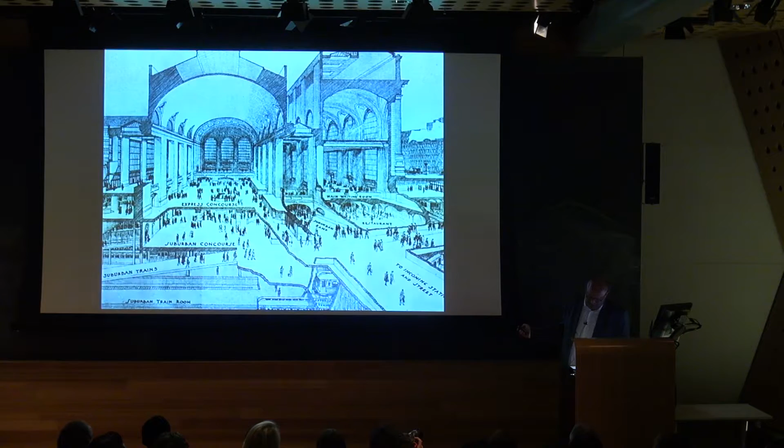This model of urban building ended, however, in the early 20th century with the rise of planning as a discipline distinct from architecture. With more efficient delivery systems for water, power, and transportation, requiring a skill set in management and logistics over that of the orchestration of public appearance, the relationship between the two fields became progressively more detached.

Today, the design of the flows of water, waste, power, vehicles, etc. produces de facto a genus of public space that is neither urban nor public. For architects, it has also preempted a false choice between designing on the one hand a demure background building, so-called background building, and on the other, pursuing a more solipsistic rhetorical agenda - the icon object building, more interested in autonomous expression than collective engagement.

Since the Reagan era, however, the now century-old systems model of infrastructure has proven increasingly difficult to implement. Onerous processes of appropriations, approvals, bidding, and oversight have made the public sector incapable of delivering projects as timely and cost-effectively as its private counterparts.

With the money that's actually available, and fearing the public will be all over them, the agency has determined to build a segment of rail that goes from a rural city to a rural city, so it can make all its mistakes in the relative obscurity of the countryside before entering the more urbanized areas.

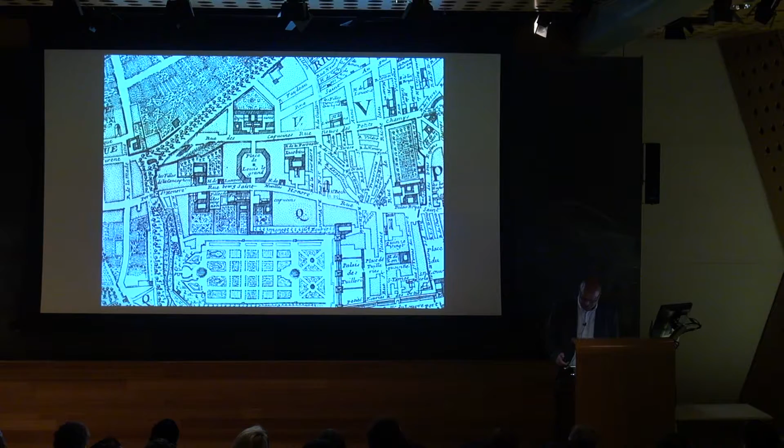This, for the property owner and his or her architect, offers the opportunity to enhance their political agency by using contents and appearance as a double-jointed proposition, as Trojan horse or as bait and hook, eschewing the fixed dynamic of NIMBYism in favor of a calculated strategy of trade-offs. Public benefits are built in as a means of sweetening the collective pot to elicit stakeholder or market interest.

So this is how it eventually got developed out with all of the housing around it here that you see. And I think what really becomes interesting over time is when you get these kinds of things happening.

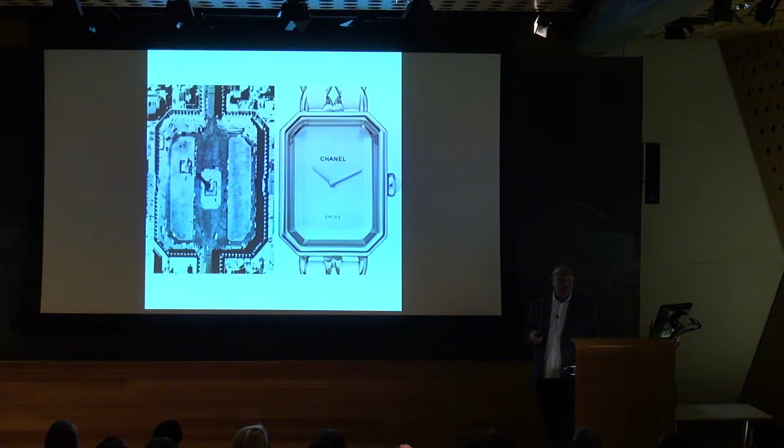I dare any infrastructural technocrat to imagine how a piece of infrastructure could actually have enough strong identity to generate its own jewelry. But I think that ought to be the inspiration that, in a way, the object icon is not the only means of achieving notions of identity in the city.

This is, again, kind of the Trojan horse aspect, the kind of paradoxical nature of the city and the question of identity.

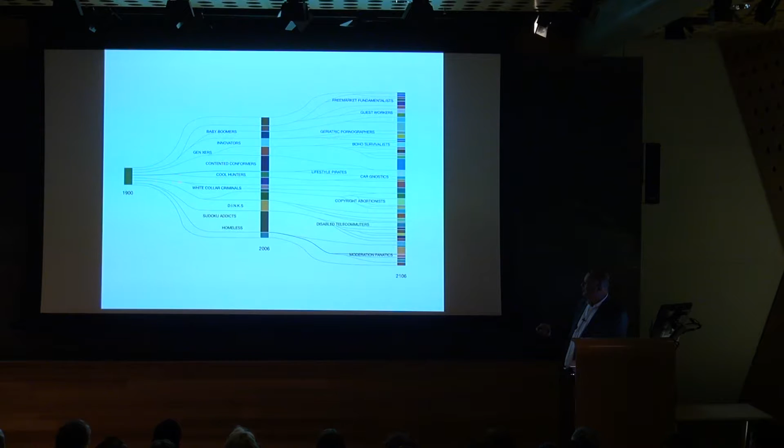So I showed this a little bit at the lecture, I think, but we tracked in an earlier exercise that I worked through for the History Channel with Dana Cuff and with Bob Somol, an idea that culture has really splintered into many different subfactions, much in the same way that we've gone from four network channels on television in the 60s and 70s to literally thousands of cable channels today to address the various tastes of people.

Yet infrastructure itself still works according to a kind of universalist model of what is best and what is optimal for all people, when in fact we use the city in different kinds of ways.

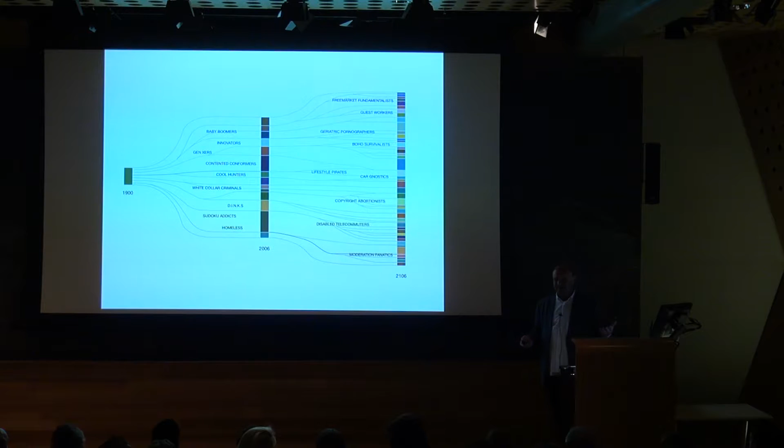So my question really is to think about whether we could explore the provision of collective benefit, of collective spaces and collective services, in as varied a way as we have for many years as architects in object making. These are all of the different enclaves that have, to some extent or other, been starting to provide their own infrastructural models according to the battery-powered paradigm I'm discussing today. They use different mediums and methods in each case, but they all begin to do that.

Why? It's because the universalist model of infrastructure is no longer sufficient to support all of these different subcultures and communities equally well. There are disadvantaged groups. As we know, there's a lot of inequity and inequality. And in many cases, they take up the slack through the private sector to begin to provide those.

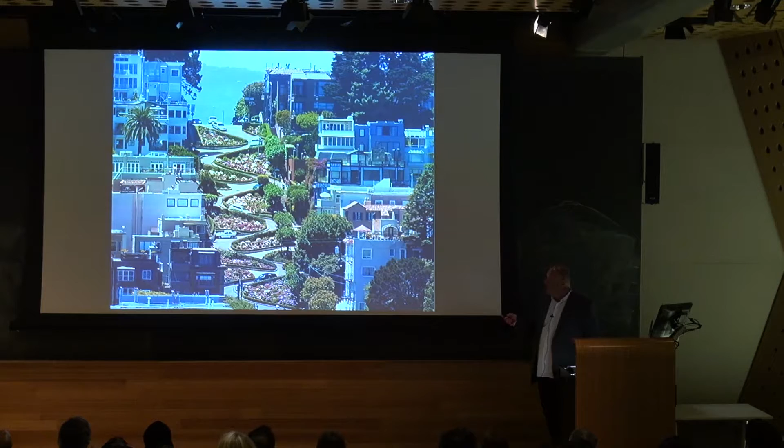In this particular case, by contrast to traditional infrastructure's linear logic of optimization—how best something can perform—the battery-powered model is charged by the uncanny possibilities of reorchestration: how else things can work, or how else things might work. This makes particular sense in an era of unprecedented digital connectivity, characterized by a sharing economy that prizes access over ownership.

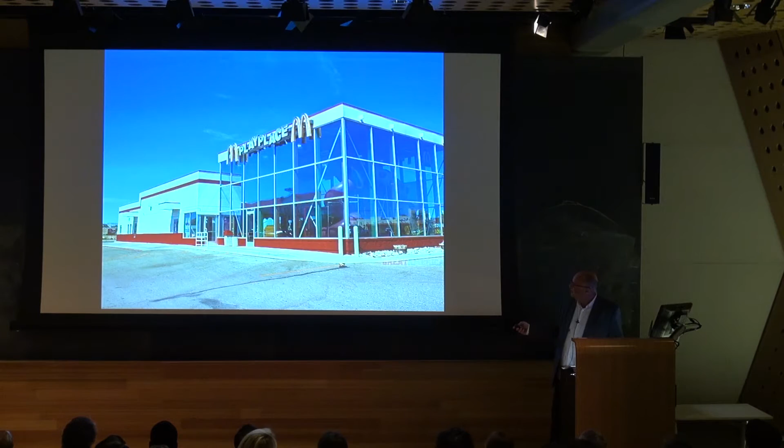A lot of people are appalled, especially when I go to talk to urban designers, appalled that I show this example of the McDonald's play space. But like it or not, in many communities of the city, this is the only recreational space that lies within walking distance of where people's households are. So they may be still trying to sell hamburgers, and there may be something greatly disturbing and insidious about that.

But the fact of the matter is that as a phenomenon, a little bit like Pokemon Go, it's a recognition of a paradigm shift, and a space that has opened up for architects to step in and realize that, in fact, maybe not unlike the Medici did many, many hundreds of years ago, there's a place in which the line between public and private is beginning to gray, and there are potentially interesting opportunities to take advantage of in the best possible way.

A resultant explosion of new forms of identity holds unprecedented potential for the design of new formats of propinquity, ones more unique than the ubiquitous work, live, and play nomenclature, which has become the meme of most current development. Predicated upon a fundamental reconsideration of the public as neither assumed nor uniform, the battery-powered approach sees the city as comprised of a vast and complex array of distinct yet overlapping subcultures, the sum of which our culture at large is now constituted.

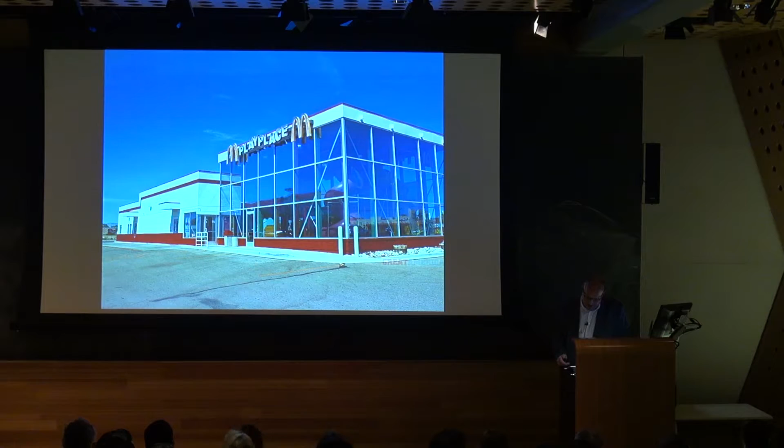So what I'd like to do is show you four projects to serve as illustrations of this. The first one I'm going to show you is one that we did in 2009.

We were commissioned by Target Corporation in Minneapolis. Interestingly, we were commissioned not by the architecture or real estate development division, but by the marketing division of Target, which is where all the innovation has come. The other thing that's really important to understand about Target is that, unlike other big box retailers, Target owns its properties rather than leasing them. So it has a larger degree of investment in being a kind of citizen, or a degree of commitment to the place where its retail stores are located.

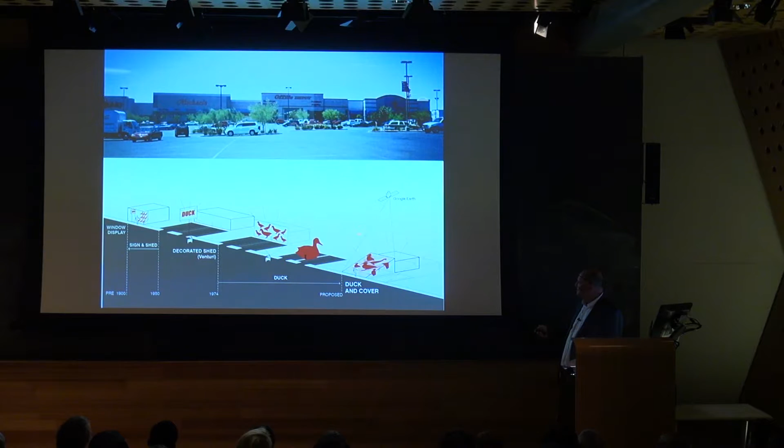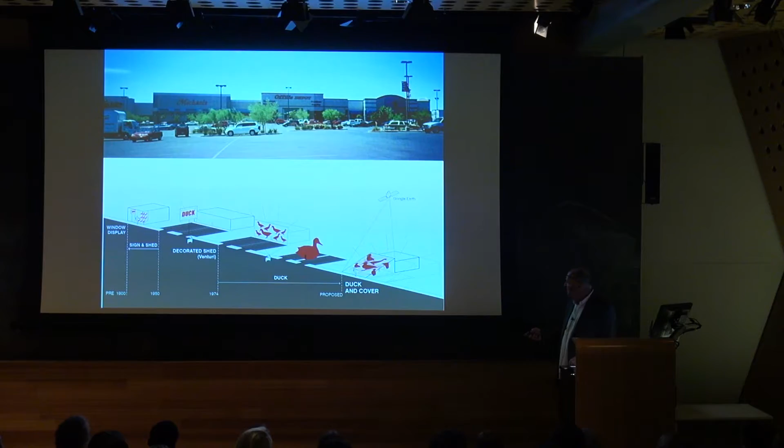In this case, we did a brief history of commercial development, which went from simple display, where you saw the ducks in the window of the store, to Venturi's decorated shed that you see here in various forms, and the duck itself, the Long Island duckling, which will make another appearance in a different project in a different form, to something we called our strategy 'Duck and Cover,' where something was actually both a sign and a habitable place. We were interested in this phenomenon where identity became synonymous with the characteristic of the city.

But we were also interested in not pretending like a wolf in sheep's clothing, where a single large building was made up like a Ponderosa Steakhouse, parading as a kind of urban streetscape. That clearly was a kind of falsification, which ultimately struck us as being more of a defensive posture.

What was interesting about the challenge of Target, and the reason they hired us, was to come up with a new paradigm whereby they could move their stores into cities where there wasn't enough land to use the same suburban formula of a big box surrounded by a parking lot. So they had to find a way of consolidating things. The reason they were interested in doing this was because their market, as many of you have read, people are moving into cities now from rural areas. In order to keep their profits up, they need to follow the population, but they didn't have a business model or architectural model to figure out how to do that.

They were finding a lot of opposition from communities worried about them taking away jobs. So we tried to create something more problematic or paradoxical for these communities by setting up a quid pro quo, where we'd say, we're coming into your city, but rather than just suspecting that Target's going to be taking away jobs, we're also going to provide you with something else you lack, namely public space. So every time you get a Target, you get public space that you direly need. Suddenly people began to weigh the difference, like, oh, maybe this is worth it because I don't have a place to take my kid.

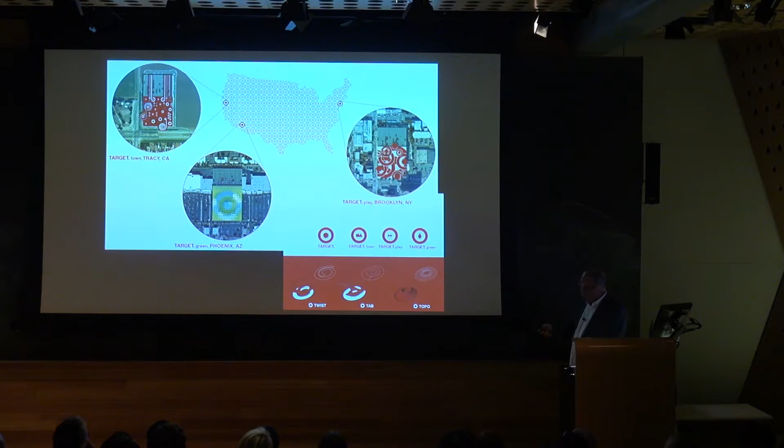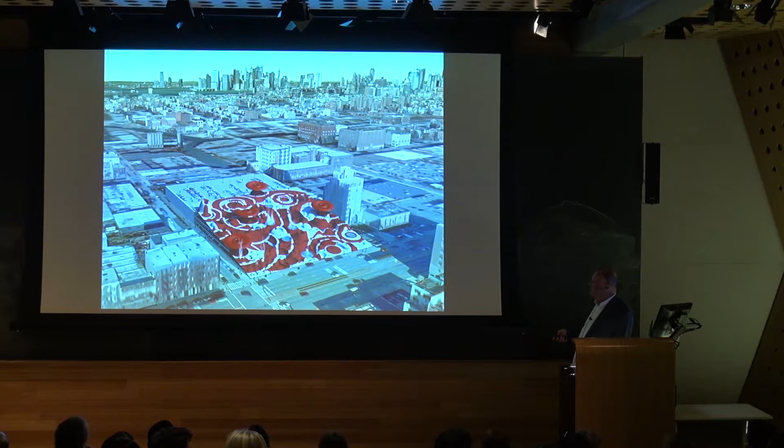This is an area—I'll run through these quickly, they're fairly self-explanatory—but we were very attentive to the Google view of this, interested in how one could use Google Earth versus the bird's eye view versus the street level view as different ways the project could begin to appear different as you move down in point of view. So this two-dimensional image, which the marketing department was very interested in and had experimented with at nearby airports where planes were landing, began to become three-dimensionalized as you move down from that privileged point of view.

This is Target Town outside of Tracy, where we used a kind of spiral. We had diagrams showing that we used different carving techniques to actually model the surface. We basically hid most of the parking either on the roof of the box, and additional parking, since we needed more than that, was snuck underneath these public spaces, where you would slide into the cuts in the oblique surface to find your way into a lot of the satellite uses and particular areas of the Target box itself.

This is in Phoenix. Those are all solar panels. We had aviaries. There's even camping.

Target Green was not so much about greenwashing. Well, actually, I should say it was exactly about greenwashing. This whole thing about saying, oh, this is very sustainable, this and sustainable that, is just a matter of trying to get something through approvals because you're trying to check off different boxes to get your LEED certification. So we half jokingly, but in a serious way, said greenwashing should be taken more seriously as a technique so that you're less interested in green as sustainability alone, and tying that in with having that market segment.

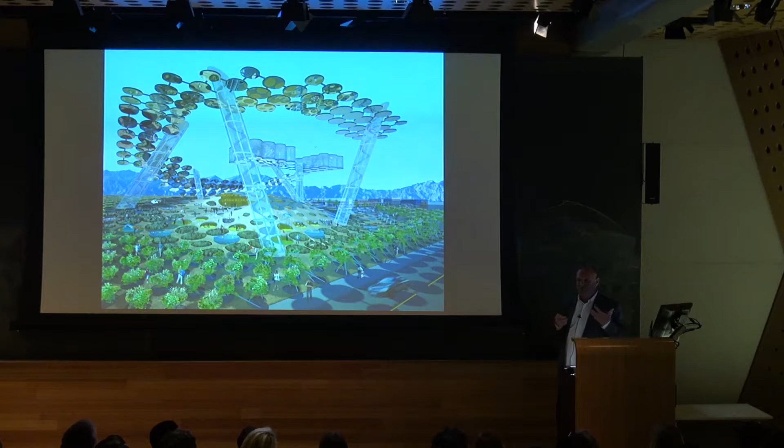Instead of being so shaming about or politically correct about it, we're simply interested in anything that's green. So we looked at everything from algae tanks to putting greens to camping, to things that were bona fide green in other ways. The idea was to enlarge the catchment area of people who would be attracted to come here. So the goal was not simply to service, as in the old model of infrastructure, it was actually to attract, as in the model of private development, to make this a kind of destination.

There was a parking requirement for the project, but when the garage was entitled many years ago, cars were much bigger. The parking requirements had since been downsized, so the spaces you needed to stripe inside the garage were no longer as large. When you restriped the garage and recalculated how much of it the parking requirement took up, it turned out that 30,000 square feet were liberated to become something else, because there was extra space. So there's actually excess capacity from the overbuilding of that infrastructure.

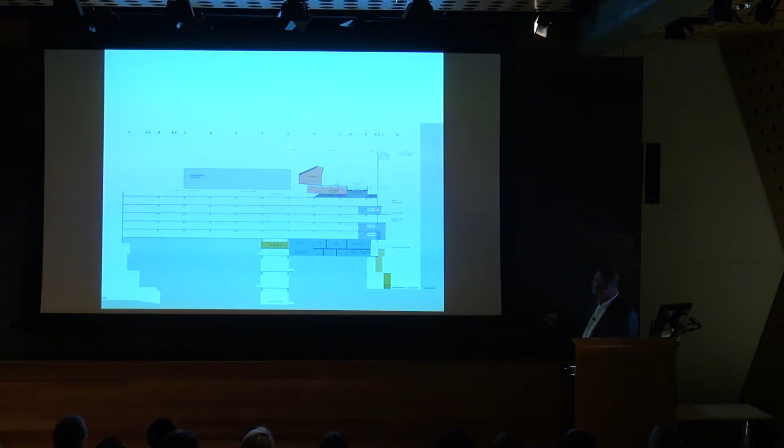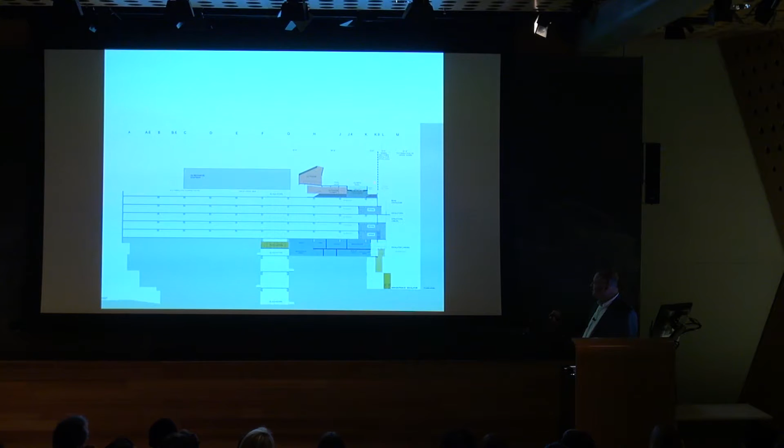And that's where the project actually took root. So we began to look at how we could hang things off the side of the garage that looked out onto that Rockefeller Center-like space, by stuffing stuff into the garage and taking advantage of the quality it had as something desirable to, say, creative office, a private club, an art movie house on top, a restaurant, a bowling alley with 18 lanes, and then basically linking everything with a series of escalators up the side, sort of a la the Pompidou Center.

So these are all demarcated here. These purple things are the punch-outs of these offices where you could actually drive up the garage and park your car right off the side of where your office was, but you'd at the same time be linked to this escalator system. These were holes actually cut in the old wall of the garage to expose some of the cars. So it was a kind of flipping up of a plan into elevation of sorts.

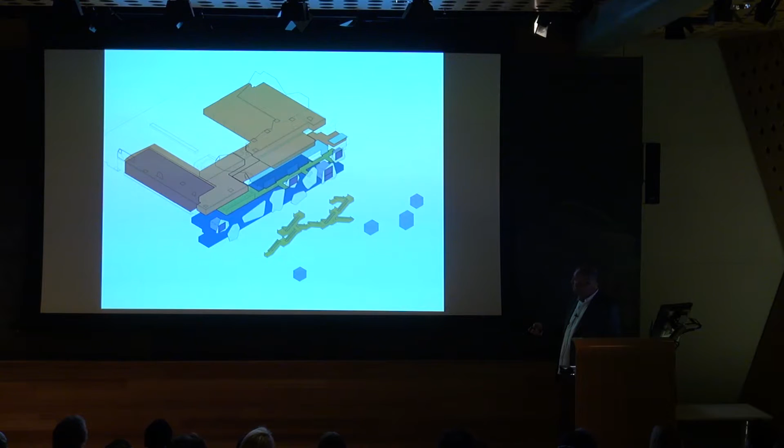We did a very large study model of what this might look like. This is sort of from the side with these really oversized awnings on the bottom. And this is kind of what it began to look like.

This is slated to be a later phase development. They're just finishing up the first phase of the project now. You can see the escalators going up, and these are the offices sticking out. They come out 15 feet and go into the 18 feet of parking stalls that used to be there, so these offices sit halfway in and halfway out of the garage. And then the overall effect...

We used a kind of marquetry pattern, like wood marquetry, to create a facade that would seem to shimmer and have a three-dimensional illusory effect when viewed, that fragmented and in some senses denied its work back and forth with its flatness, where you really weren't sure where the building was. You saw patches of people working, patches of cars, patches of marquetry, as a kind of collage of activities going on at the same time.

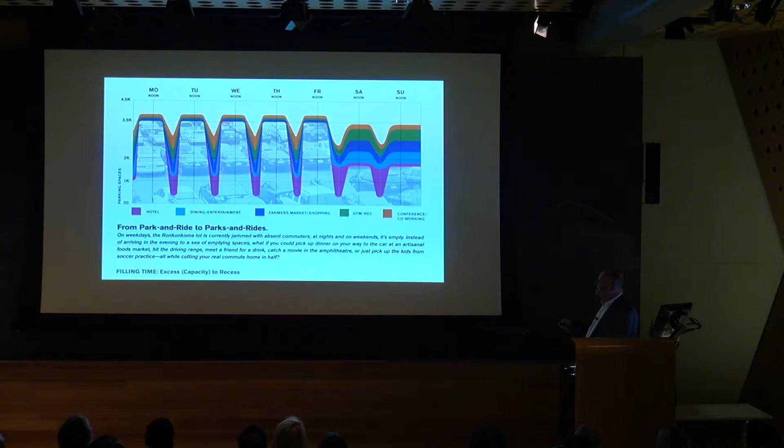So we began to look at how there might be a way of building in a series of other attractions that would incorporate the parking but add additional things to it, really becoming a regional destination. We used the idea of the parking itself to leverage a series of connections to other activities you could get to on your way to the train, on your way home from the train, or just coming there when you weren't using the train—because the flow of passengers and commuters between Long Island and Manhattan has now fundamentally shifted, so these people who live out here are no longer assumed to be commuting into Manhattan in the morning.

Many of them are actually commuting just down the line one stop, or coming up the line another stop, or choosing to work at home. And so the role that these stations play is fundamentally shifting from that of the bedroom communities that used to characterize them. So our starting point was to look at this as a counterpoint, kind of the alt version of Manhattan.

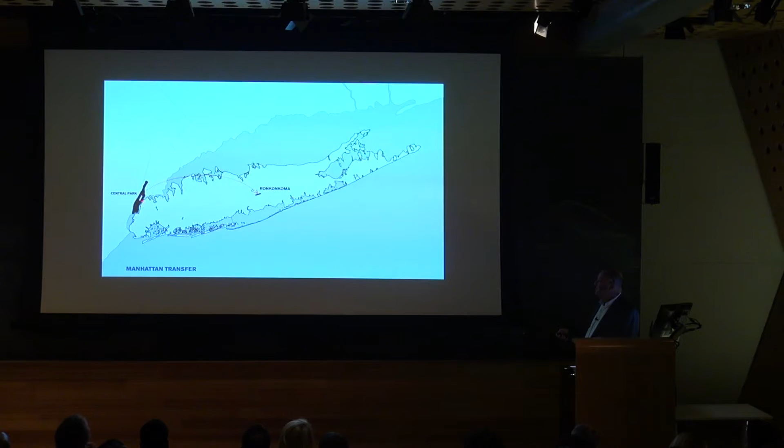Providing to the emptiness, the ruralness of Long Island, what Central Park does to Manhattan's density, so that this would be the one island of density amidst an island, within an island of rural fabric, of agraria, just as Central Park is a contrast to that.

And then we quite literally went through an exercise of figuring out how Manhattan's block system would overlay on our site. Astonishingly, this site is so large that 12 blocks of Manhattan would actually fit on it.

And then we started looking at the fact that we could inescapably not make the association between the fact that Manhattan came with an idea. There was a moment at which the romance of the airplane, and the fact that MacArthur Airport was associated with our site, kind of came together with Manhattan at one point through the element of the Empire State Building.

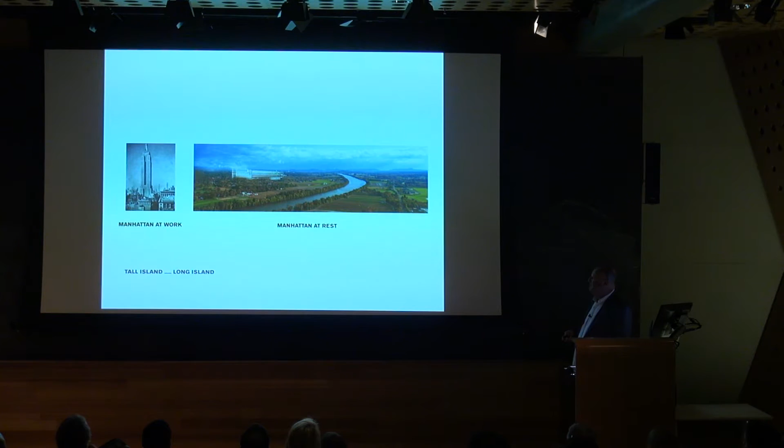We began to play around a little bit with the idea that maybe that might be what Manhattan at rest would look like.

And so we started to think about whether or not that could be something that was to the 495 what the Long Island duckling, and a number of other roadside attractions that had developed there historically, had characterized as being your trip out from Manhattan.

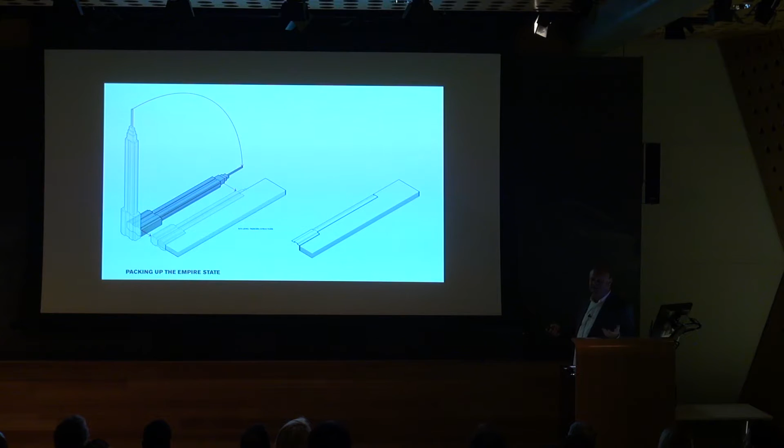So we took the figure, the primitive of the volume of the Empire State Building, which is not even as long as the site is, and we used it to carve away at a generic parking deck, imagining that the whole site was filled with parking. We did it once, then we flipped it around and did it again.

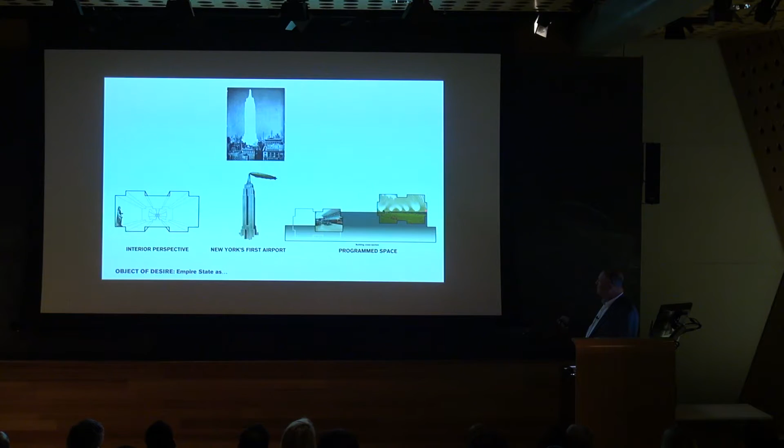And we began to carve a series of figures into the block, one of which was pushed in from the side, which has subsequently become the train station, and another one of which was pushed in from the top, which became a kind of winterized athletic facility, not unlike the Carrier Dome.

And then we also similarly looked at things that we knew to be Manhattan-like: Chelsea Piers, Times Square, Lincoln Center, Chelsea Market, and so on, and figured out just wanted to think a little bit about how many of those could fit on the site.

If you were to create something that economists call a family entertainment center, a family activity center, which is a place basically where people who are looking to do something with their kids when it's raining, when they're not at the beach, can go do.

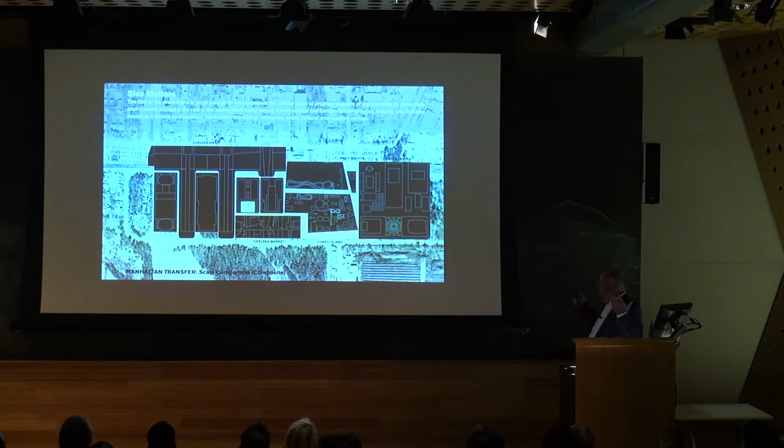So this project became programmed with a bunch of those other kinds of functions inserted in the gaps where the parking was not, with the parking serving as the poché in between these figured spaces.

And then through it, we skewered a series of itineraries, or trip chains, for different types of people as they might have reasons to cross through the project.

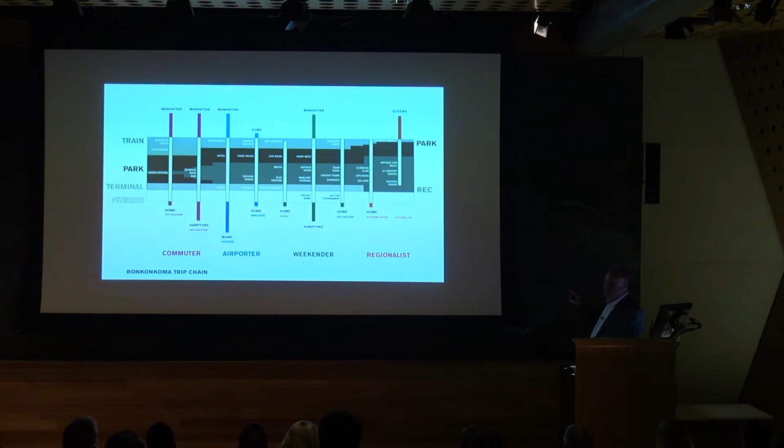So versus Manhattan, where everything would be very typically layered in a very regimented way, we began to look at whether or not we could create a different kind of wafer sandwich by having the parking alternate with the different functions.

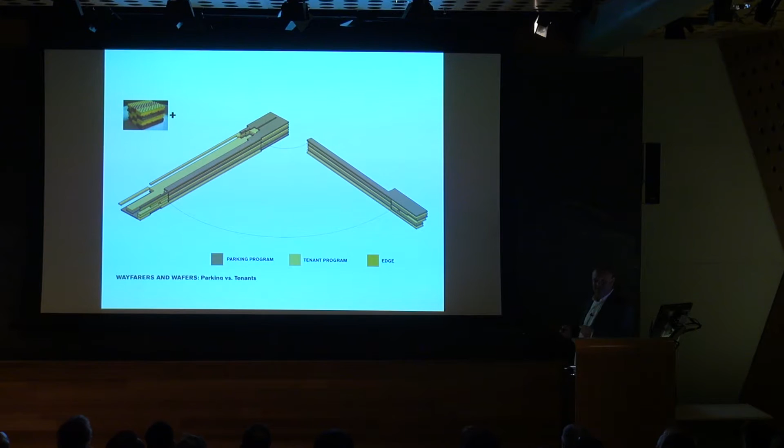So parking alternates with tenant program, and you could actually, once you parked, just go up or down to your office. You didn't necessarily have to walk across some large expanse to get there.

And then we wove into it a series of parking ramps, which we called New Park Avenue, right down the center, a center spine, which basically wove the different layers together vertically. It was an interweaving of both parking ramps and pedestrians on escalators.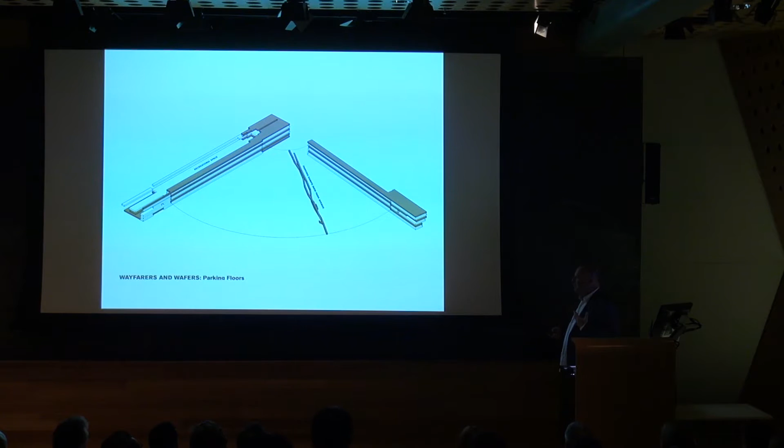So it would be like imagining that you were to allow a car into a mall, into an old indoor mall. Of course, we were anticipating at the same time that the car is on its way to becoming without emissions, which would enable the intertwining of those to ultimately become even more liberated.

So the sections started looking a little something like this. This was the point of arrival in the train station shelter on the north side.

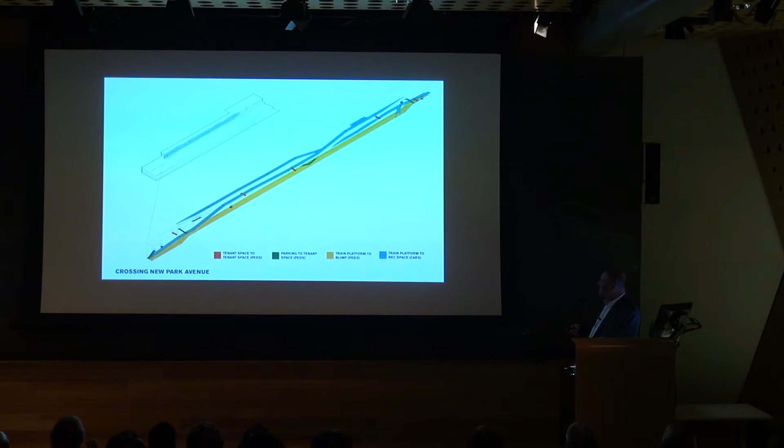This was the spline that I mentioned before, with the train station platform in yellow, and the ways of accessing things by car in blue. This is some view of that space, which has intertwining linkages between offices on different floors, interweaving with car linkages on ramps and bridges between those alternating floors.

Something reminiscent of the Italian Job, putting a pig in a parlor. That's really the kind of device, the Trojan horse aspect, to say a building can be infrastructure and infrastructure can be a building. In other words, deliberately trying to confuse categories of things to get a kind of astonishing effect.

And this is a little view of what that would look like inside. This is special for you, we recolored it orange. No, I'm just kidding. In fact we had a different motive, you'll see in a second. It wasn't an ode to Syracuse.

It was actually the fact that we were interested in the fact that, as many of you know, all the buildings within a certain proximity of the airport are checkered white and yellow, or white and orange. So we did a montage of these different things together. We wanted to create a soft Empire State Building because of the athletic purpose. We wanted it to be near the airport, so we had to be attentive to landing planes and so on, which produces these kinds of scenes around it.

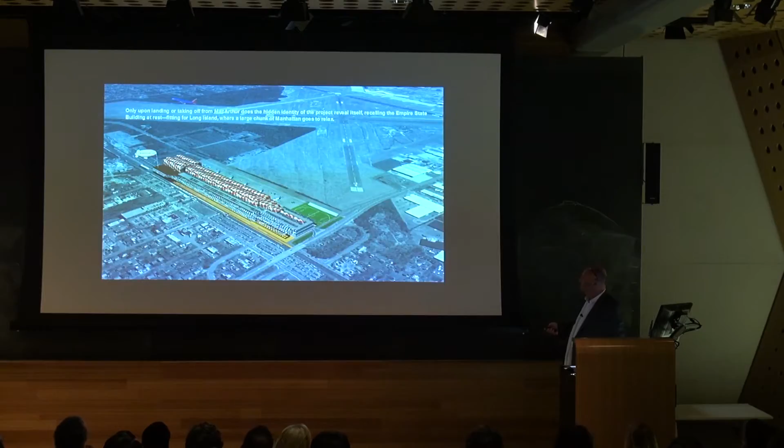This is just a kind of postscript to it. We published a newspaper, actually an online newspaper, a website for the project, which I've become very interested in doing, which talks about the future of the project. It's a way of presenting the project as if it were written at the time it would be built, 20 years in the future, so that people could begin to imagine from the point of view of different stakeholders and audiences or subcultures how they would engage the project in entirely different ways.

So on the website, which is www.ronkonkomaparksandrides.com, you can click on each of these and they open up into larger articles. There's food criticism of a restaurant, and even the ones that are reviews of movies and so forth always have embedded within them elements of the story of the design itself through a particular point of view. We asked a variety of different people to write them, so that we could allow for the entry of different readers, those who would receive the design in a way that wasn't overly scripted by how we had conceived it.

Okay, last project. This one was through a similar observation, again about the insufficiency of infrastructure. This is the project that Lindsay mentioned called Hypo Park. It's a prototype that we're going to be implementing, hopefully in the next year or so, through an association between my old firm and Gensler.

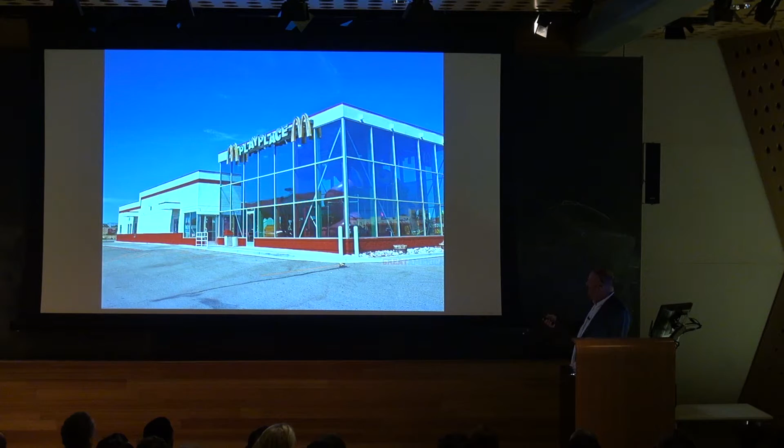I go back to this to allude to the idea that this is more resemblant of the current paradigm of where we're at. However offensive it may be, it's indicative that there's been a paradigm shift in terms of what people consider a park, or where they'll go to have fun—meaning kids would rather go here than into MacArthur Park, which I showed you. That became an interesting opportunity to explore whether, from a design standpoint, there was another false dichotomy being set up.

This was between the idea of open space and infill, and why there couldn't be something that blurred the lines between something open and something solid and void. So we sought to create what Andrew Zago has referred to as a kind of empty density—something perceived as infill, and yet it's not quite that way. The project, Hypo Park, the prototype we developed, is located in Koreatown. I'll tell you a little about it.

We did some comparisons, and this is how we worked on it: this is what you can do in MacArthur Park, and this is what you can do in Hypo Park. This is another way of outlining it—the anatomy of it, I'll go through. Dry as it may seem, this is very important because it really outlines the strategy.

Hypo Park actually has an FAR—the first time a park could ever be said to have a floor area ratio—because it has more than one story. The land itself is not assumed to be the park; it's actually just half of the park. As a consequence, you have a lower land utilization cost. You burn three times more calories because of the activities sponsored. The maintenance costs are greatly lowered because there are no plants in it.

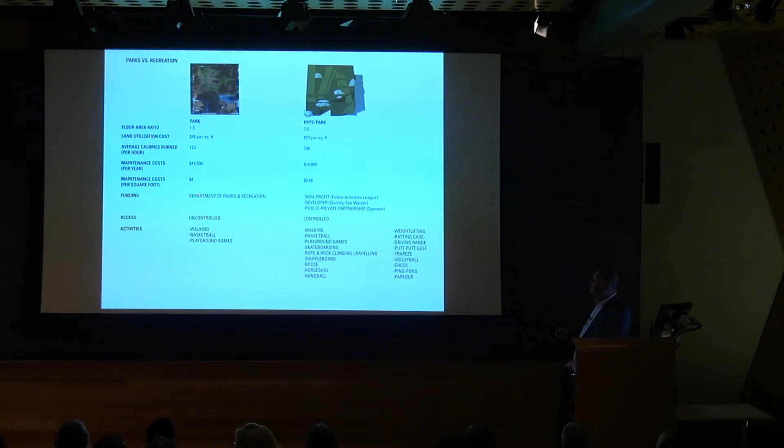And importantly, you actually open yourself up to a variety of other interested parties than just relying upon the Department of Parks and Recreation to do it.

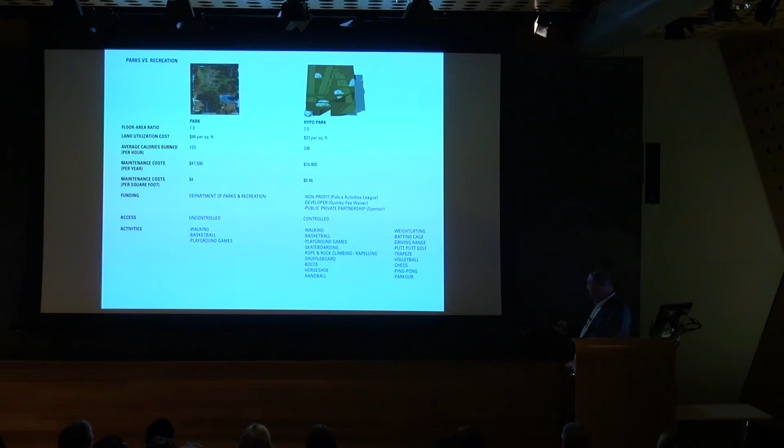That seems very dry, but that single page—students, it'll be hard to appreciate this—that single page was like the eureka moment when we showed it to people. It becomes beautiful to people when they see that page, whereas when they see the images, they're not sure yet. But then they see that page and they go, oh my God, this is fantastic—we can do all of these things. It helps us do stuff.

A lot of times people see things from a variety of different perspectives, and we may have had our own agenda in terms of the kinds of things you're looking at with respect to qualities of transparency, mixing together ideas of art, graffiti, landscape, super graphics, nature, and so on. But in order to make it beautiful to other people, it has to have a kind of embedded intelligence of an infrastructural planner or infrastructural thinker.

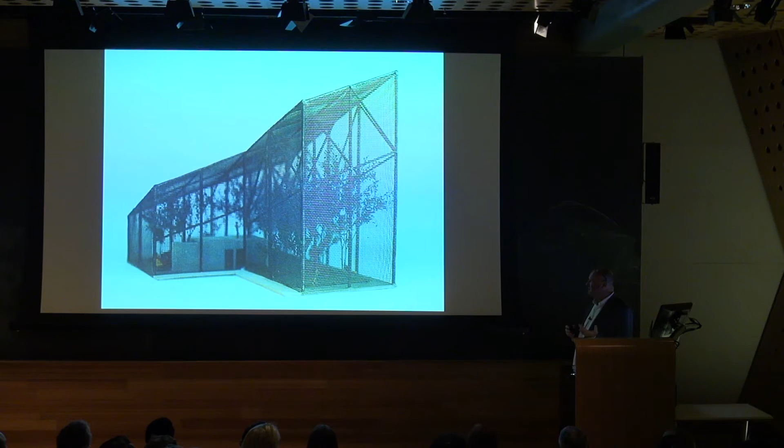I'm a student of history, so we went back to a very obscure early study—a little study that Frank Gehry did just prior to building the Cabrillo Marine Aquarium down in San Pedro, which the class visited—where he was looking at the idea of enclosing nature, making things considered just to be fences into infrastructural elements that were actually volumetric. We then created a kind of morphology of elements that came together.

The clouds you saw in the renderings were used for campsites, putting greens, and parkour, and for birthday parties they could be rented out. The sets of bridge courts and ramps were used by seniors at a 1-to-12 slope, per ADA. They all had differing logics.

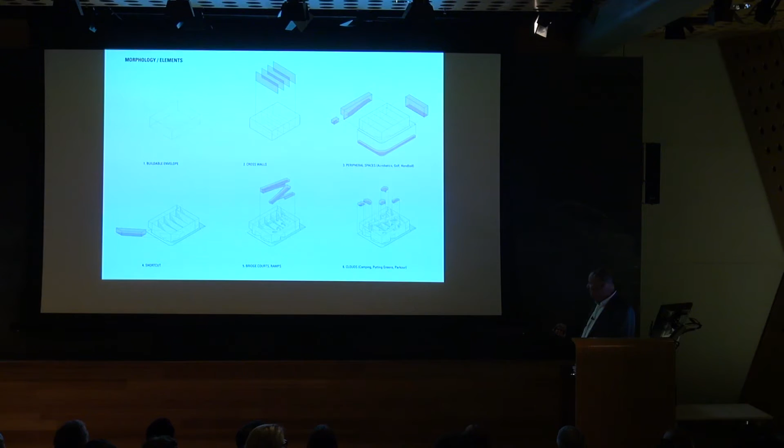These are more recollective of the bouncy house. I know it's very funny and sounds flip, but I'm interested in interrogating these kinds of things and seeing whether you can make a silk purse out of a sow's ear, because somehow their popularity speaks to an untapped potential. We were also interested in explorations from Lichtenstein and how nature could be portrayed in a very flat way.

This is very different than what Georgina is doing, perhaps, but maybe related. We did a study with Ed Richet about overlaying graphics on photographs of landscapes that don't necessarily relate to one another, yet conflating two places at once. We experimented with transposing the typical nature scene of MacArthur Park and reproducing it graphically through a kind of three-dimensional spatialized collage.

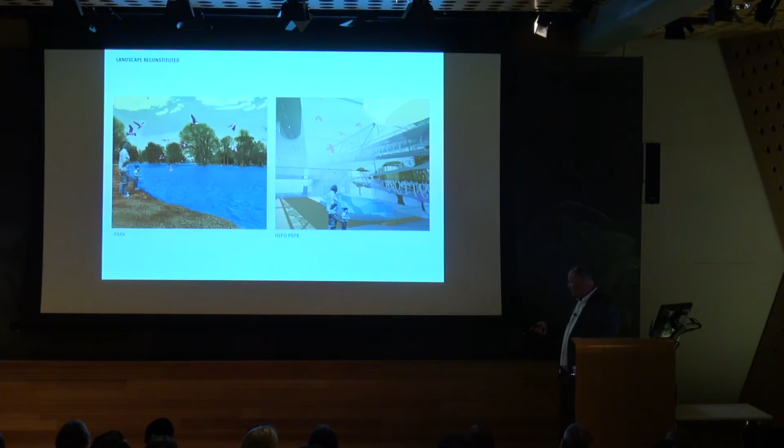This is a bit of what it looks like on the inside, with the bridges crossing over.

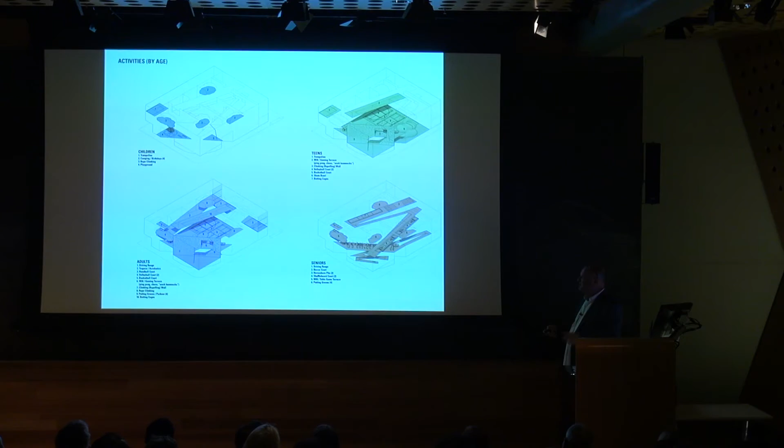Some things divide and look at these different audiences, thinking about service versus catchment, and about what may attract children versus adults, seniors, or teens, without necessarily turning those into caricatures, just as different elements of the design. This is another view.

We also did a timetable, as in a couple of the other projects I showed you, thinking about how the density and intensity of uses would differ over time. This offered a bona fide alternative, very attractive to the investors, to the old model where a park becomes sinister at night but friendly during the day. Instead, this park can be closed off as a set of capsules or organs, enabling other pieces to remain open at limited hours.

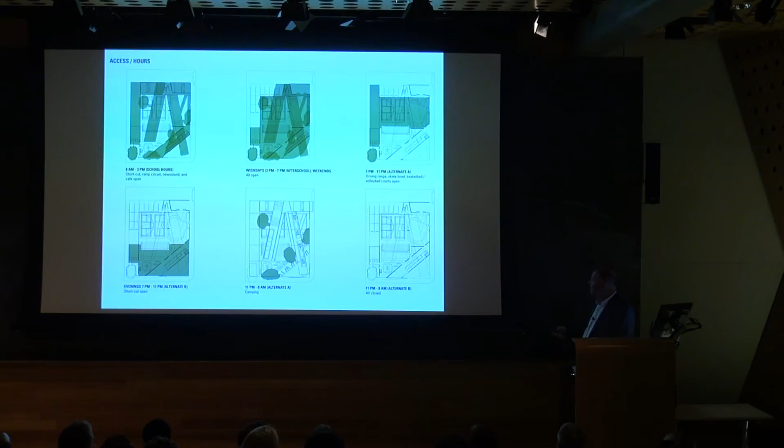It also incorporated two concessionaires — a small juice bar in this location, two handball courts above, and a newsstand on the other side. There's also a bike rental shop.